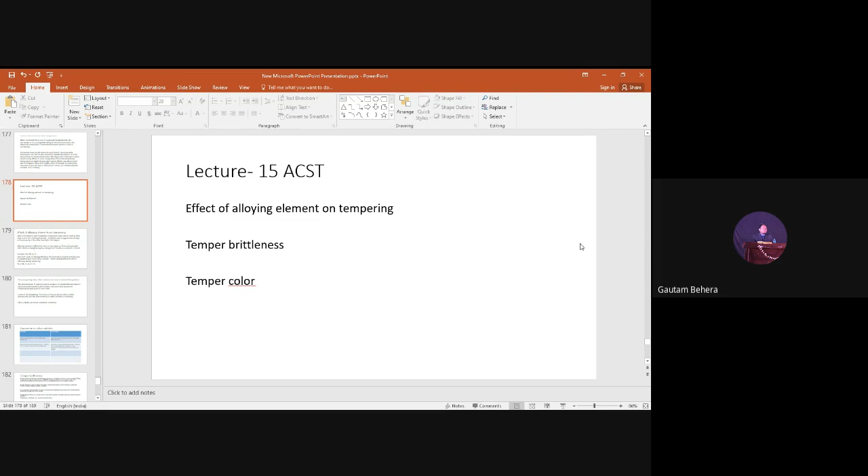Good morning, sir. Okay, today is lecture number 15 of this advanced concept in steel technology. And today's contents are like this: the effect of alloying elements on tempering, and temper brittleness, which is also called temper embrittlement. And the last topic, that is temper colors.

So, in the previous lectures, we have covered the details about martensite and also discussed something about tempering: what happens basically during the tempering process, why softening will be there during the tempering process, and how the toughness is increasing in the material. So now the topic is effect of alloying elements on tempering.

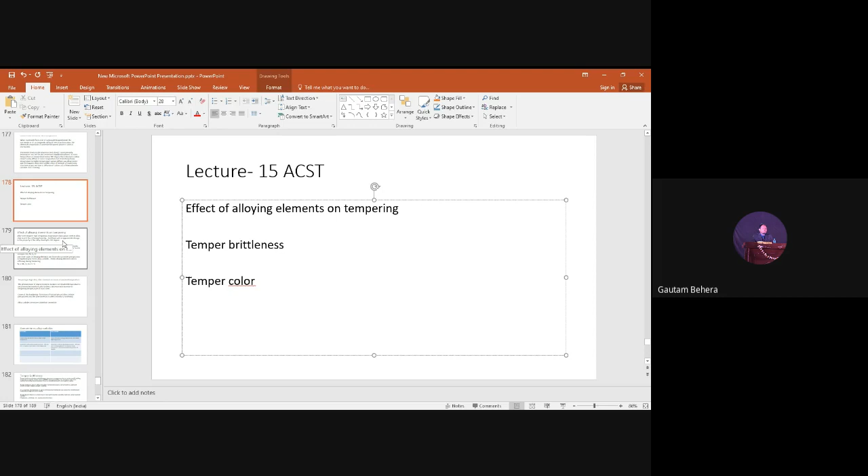So basically our objective is to improve the toughness, right? When we do hardening heat treatment, the martensite which forms is harder but brittle in nature. The toughness of the steel is very poor, ductility is very less, and a lot of residual stresses are there in the steels. So the tempering process helps improve the toughness of the steels. It also removes the internal stresses, right?

In other words, by doing tempering heat treatment on steel after hardening, we increase the ductility of the materials, right? When the ductility comes into the picture, then we have good toughness, because toughness is a combination of good strength and good ductility, and strength and ductility are opposite in nature, right?

But when we are dealing with alloy steels, the steel containing alloying elements, not plain carbon steel, during tempering the softening will not always occur, or the degree of softening will not be so high compared to that of plain carbon steel. So plain carbon steel will soften easily, but alloy steels will not soften easily. There is some problem with alloy steels. We'll discuss why it is happening.

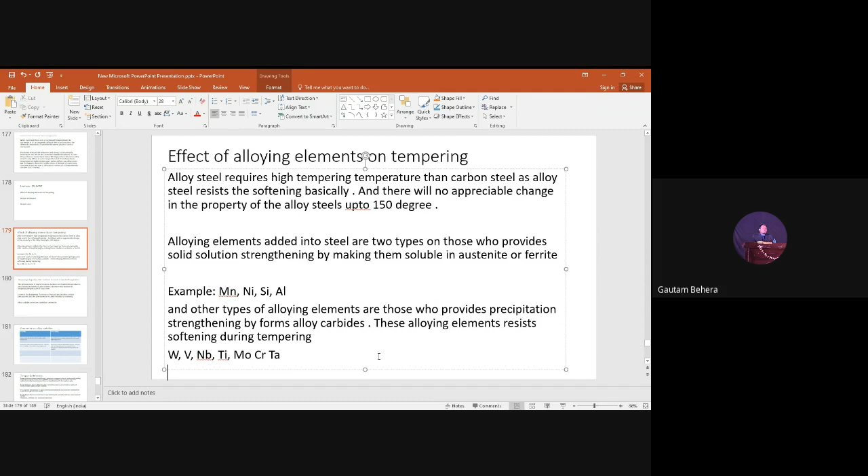Now you can see a very interesting thing I have written over here: tempering in high alloy steel. So suppose you are dealing with a steel containing more alloying elements, or the amount of alloying element is somewhat higher. What happens? Hardness increases at elevated temperature. So you people understood our objective is to improve the ductility, improve the toughness, or decrease the hardness, or decrease the brittleness of the steel.

But this is just the opposite phenomenon. You are doing tempering of as-hardened steel, and the hardness is increasing. This is very interesting. How is it happening? The same thing happened when I was working on power plant steels in my master's degree. So I was also confused.

What is happening exactly? I was doing tempering after normalizing my steel, because I have these martensitic laths, right? But when I was doing tempering, I was shocked that my hardness is initially decreasing with tempering temperature, but upon tempering at a high, elevated temperature, my hardness is again increasing. That was a shocking thing for me at that time, right?

So what is the answer? Basically, this is the answer: secondary hardening. Hardening due to second phase particles. So precipitates are the second phase particles. The primary phase is your matrix. It may be austenite, it may be ferrite, it may be bainite, anything, right? But the second phase is nothing but the particles.

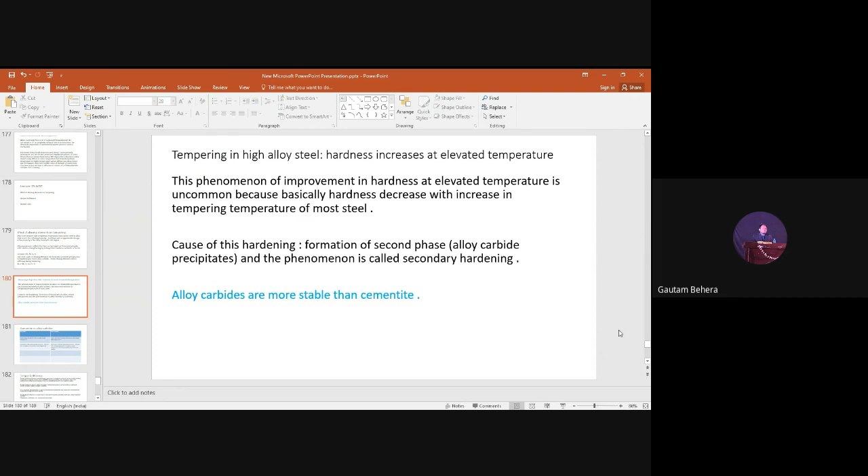Now, for that, I have this one: cementite versus alloy carbide. Cementite is stable at low temperature, but alloy carbides are stable at very high temperature in steels. Stable means they will not get soluble. So cementite will get soluble if you take the steel to 750 degrees centigrade; above 650 it starts getting soluble in the austenite matrix. But alloy carbides can go up to 1250, 1300 degrees centigrade.

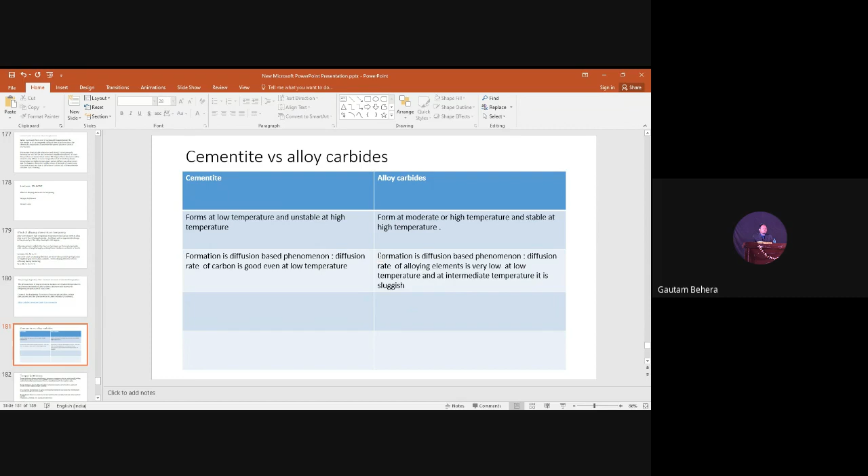There is a very interesting thing here. Just read this one. Formation is a diffusion based phenomenon. These precipitates which form in the matrix of the steel are formed due to a diffusion mechanism. If diffusion is happening, precipitates will form, right? And the diffusion rate of alloying elements is very low at low temperature, and at intermediate temperature it is sluggish.

Sluggish means very slow. Cementite formation is also diffusion based. The diffusion rate of carbon is good even at low temperature. Since the rate of diffusion is higher at low temperature for carbon, cementite easily forms. But in the case of alloying elements, the diffusion rate is very slow, so they do not diffuse much.

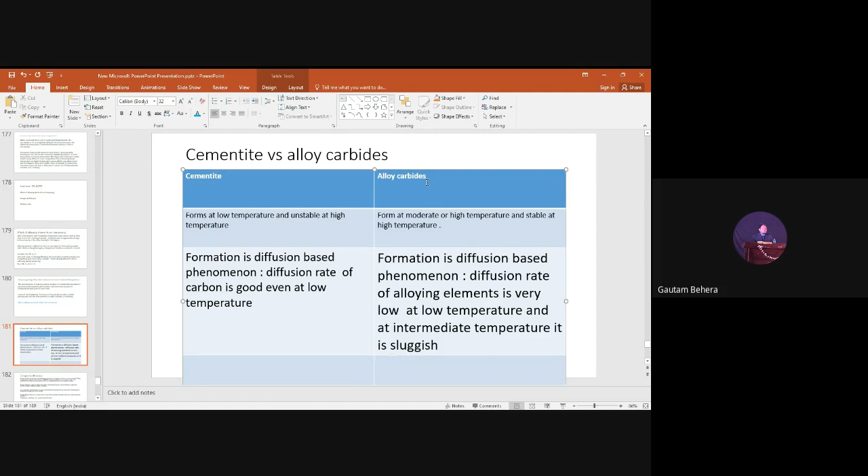If you go to a very high temperature, the diffusion rate will increase, then the alloy carbides will form. So this is the main reason behind the formation of alloy carbides at elevated temperature during tempering, which leads to an increase in the strength and hardness of the steel, right? So I think this part is clear.

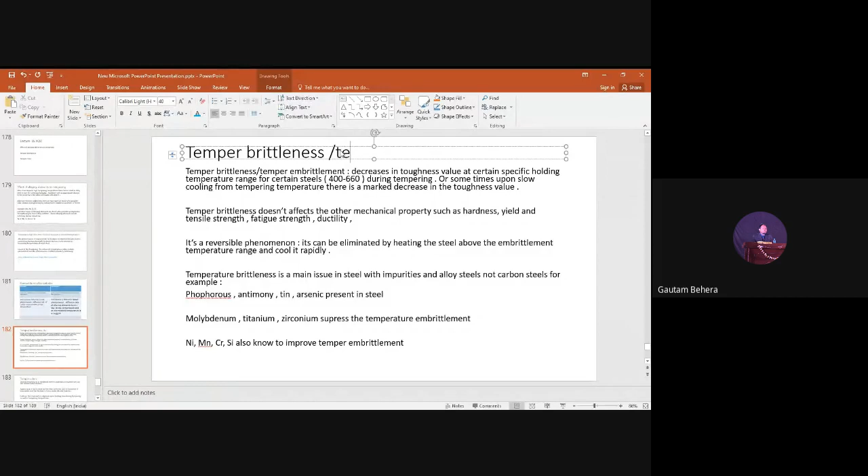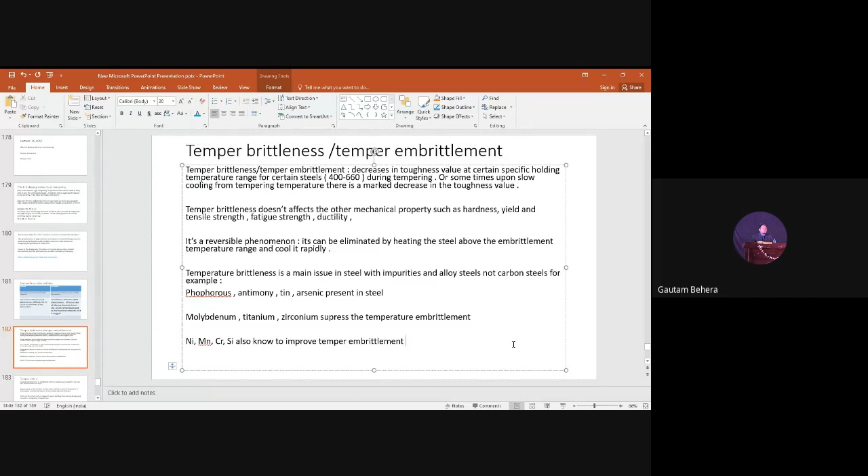Then we'll move to temper brittleness. This term temper brittleness is also called temper embrittlement. See, temper embrittlement. These are two terms: temper, brittleness. The term temper comes from the tempering process, just after hardening, right?

Brittleness comes because the material after tempering becomes brittle. Brittle means just the opposite: it has very poor ductility, or you can say toughness gets reduced, right? So these are the two terms, temper brittleness.

So there are certain kinds of steels, basically steels containing impurity elements. If your steel contains phosphorus, antimony, tin, arsenic, these are impurities in steels. Or suppose steels contain some alloying elements like nickel, manganese, chromium, silicon.

So this temper brittleness or temper embrittlement happens in steels which contain impurities and these alloying elements. There is a certain temperature range, 400 to 600 or 650 degrees centigrade. If you are doing tempering just after hardening and you are holding the steel at a temperature of 400 to 660 degrees centigrade,

the steel becomes brittle. Instead of an increase in toughness, the toughness will reduce. It becomes brittle. So that is called temper brittleness. And it also happens when we cool the steel from the tempering temperature at a very slow rate. The exact reason is not understood till now. But the interesting point is this one.

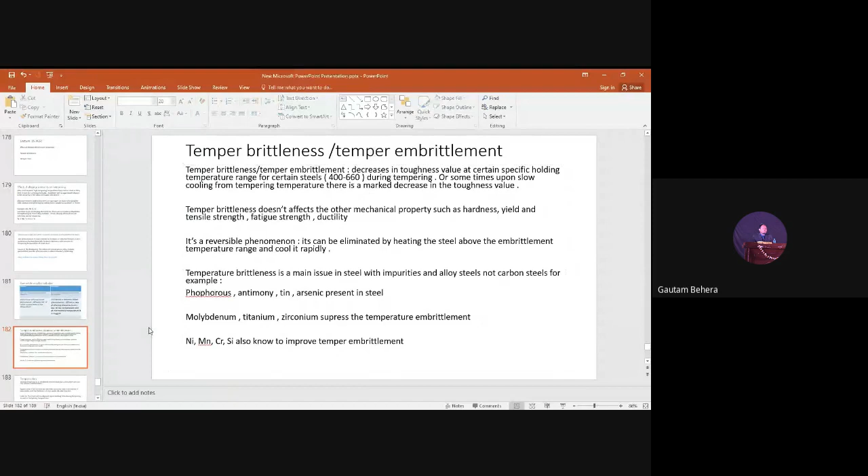So this is the last topic we'll discuss, that is temper colors. Temper colors means we will see a variety of colors on the surface of the steel while doing tempering. Hardening is done, and just after hardening you are doing tempering. If you carefully look at the surface of the steel, it will show different colors at different temperatures, from low temperature to high temperature.

The color will change when the temperature changes. If you go to a higher temperature, the color will change, and at a still higher temperature it changes again. Similarly, if you give more holding or soaking time, the color also changes. At the start, the color is basically yellow.

The color will change from yellow to light yellow, then brown, then purple, then dark blue, light blue, gray purple, gray blue, dull gray. So basically yellow, purple, blue, and gray are the major colors you'll see. The yellow color starts at low temperature, and the gray color is at high temperature.

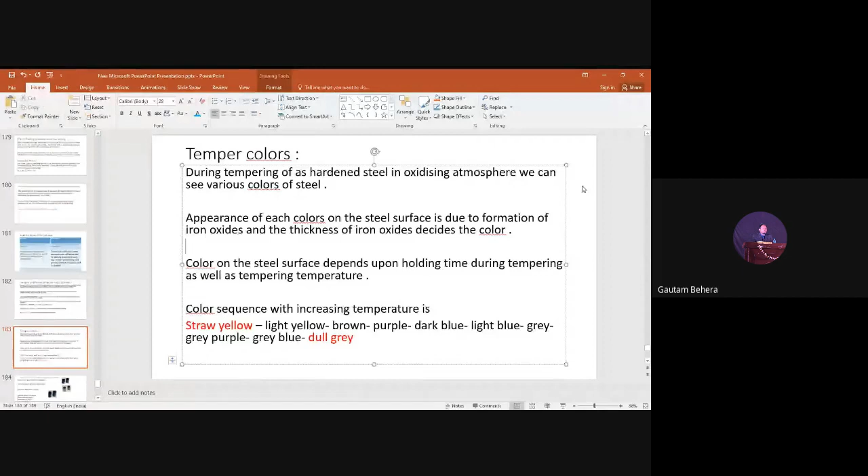What is the reason behind the appearance of these colors? It is basically due to formation of an oxide film. Iron oxide will form if you do tempering in a normal atmosphere, that means an oxidizing atmosphere, without argon or nitrogen. This oxide layer has various colors, and the thickness of the oxide layer decides what color you see. More thickness gives different colors.